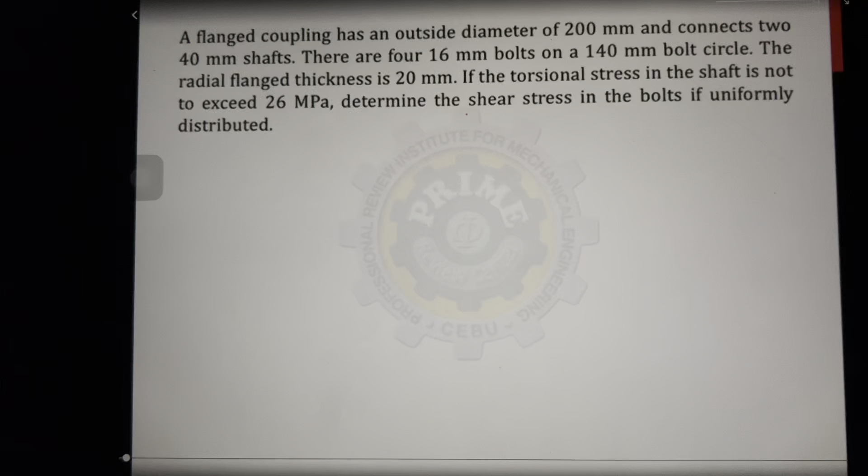Next one, a flange coupling has an outside diameter of 200 millimeters and connects two 40 millimeter shafts. There are four 16 millimeter bolts on a 140 millimeter bolt circle. The radial flange thickness is 20 millimeters. If the torsional stress in the shaft is not to exceed 26 megapascal, determine the shear stress in the bolts

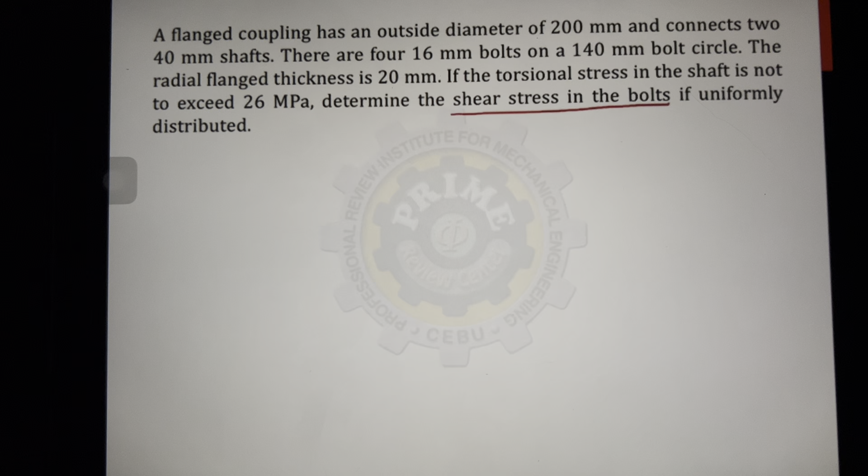if uniformly distributed. So again, yung ulit na nawawala, the bolt shearing stress. Formula still the same, 8T over pi d squared D_B times n. So given, so ito of course ating unknown. The small letter d is our bolt diameter, which is given. Capital letter D sub B is our bolt circle diameter. And n is our number of bolts. Given.

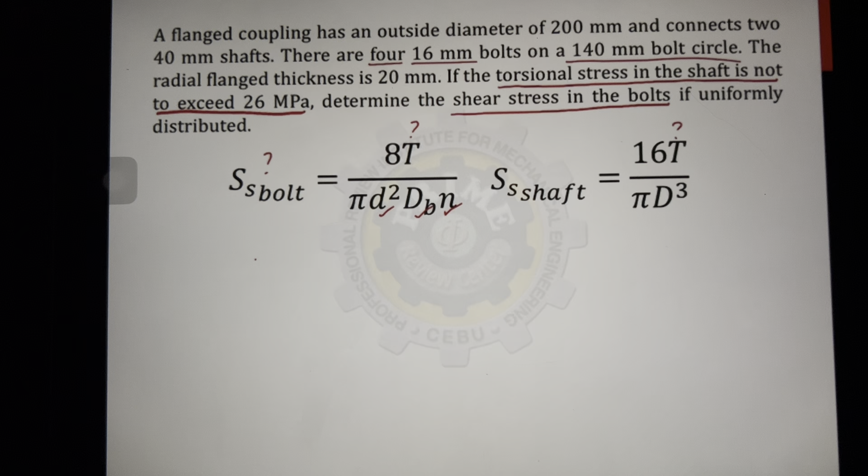Okay, our shear stress of the shaft is 26 megapascal or Newton per millimeter squared. So, equivalent to 16T over pi times ang diameter ng ating shaft. So, we have two 40 millimeter shafts. It would be 40 cubed. So, ito yung naka-millimeter and then raised to 3. So, cancel ang dalawang millimeter. So, our torque will be Newton millimeter.

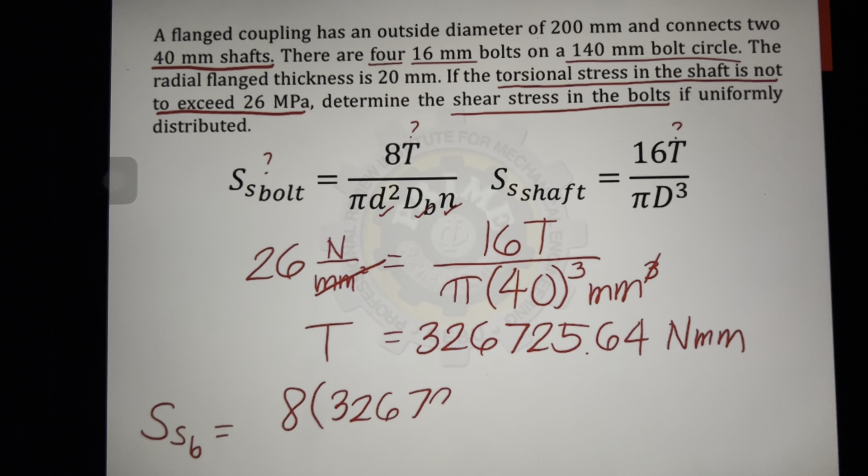What is our torque? It is equivalent to 326,725.64 Newton millimeter. So, ngayon, pwede natin masolve ang shearing stress of bolts. That will be 8 times our torque over pi times d squared, that's bolt circle of 140 millimeter times number of bolts 4. Cancel a millimeter. This will be Newton per millimeter squared or megapascal.

What is our shear stress per bolt? It is equivalent to 5.80 megapascal.

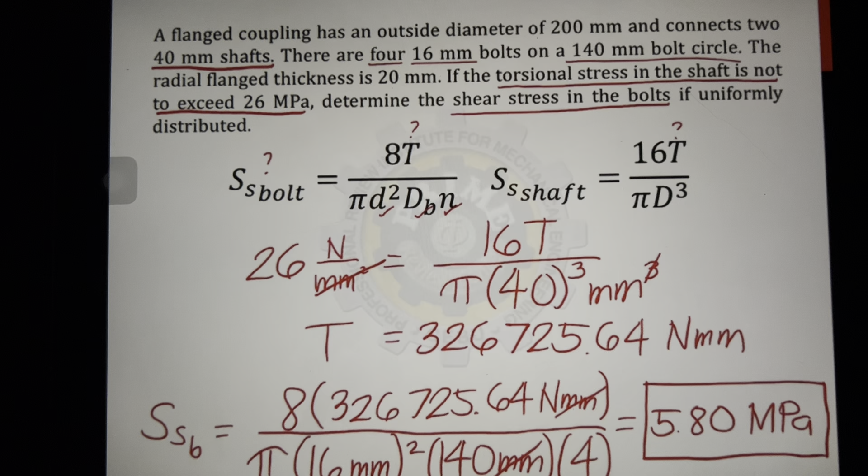Two short shafts having identical diameters of 38.1 millimeter and rotating at 400 RPM are connected by a flange coupling having 4 bolts with a 100 millimeter bolt circle. The design shearing stress of the bolt is 12 megapascal and design compressive stress on the flange is 15 megapascal. How thick should the flange be in millimeters?

So ito yung ano natin. Punta natin yung stress sa ating flange, which is 2T over d times t times bolt circle diameter times n. So itong thickness, ito yung ating small letter t. So identify natin given. So meron tayong compressive stress in the flange which is 15 megapascal. So ano pa given sa atin? The flange coupling has 4 bolts, so meron tayong n, with a 100 mm bolt circle. So meron tayong bolt circle diameter.

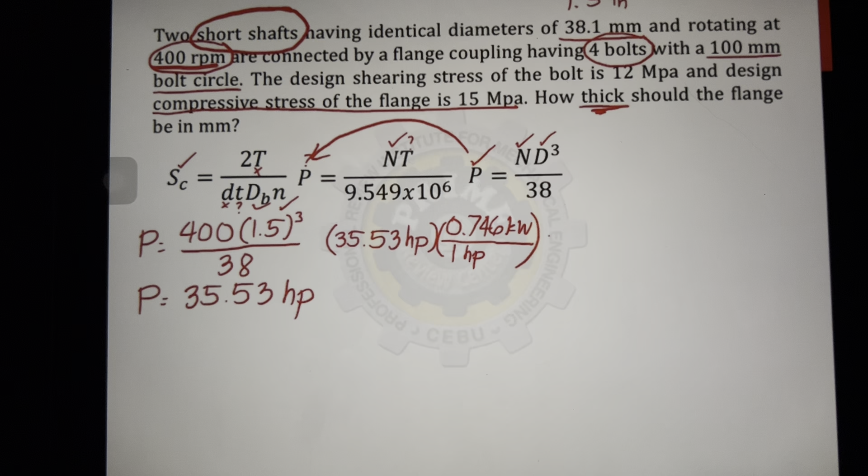So dito, meron tayong power. Gagamitin na natin. So the power, using this formula, dapat naka kilowatts. So 35.53 horsepower, convert natin into kilowatts. So we know, per 1 horsepower, there are 0.746 kilowatts. It's equivalent to N, which is 400 RPM, times the torque, divided by 9.549 times 10 to the 6. So, ang torque natin in Newton millimeters.

So, torque is 632,749.68 Newton millimeter. So, ngayon, meron tayong torque. And sa ating formula nito, kailangan pa natin ng small letter d o yung diameter ng kada bolt. So, paano natin kukunin ang diameter of each bolt? So, balikan natin ito na given.

The design shearing stress of the bolt is 12 megapascal. So, binigyan tayo ng shearing stress of the bolt which has a formula of 8T over pi d squared D_B n. Meron tayong torque, meron tayong diameter, meron tayong number of bolts, at given din ang shearing stress, solve natin ang diameter of each bolt. So, the design shearing stress of the bolt is 12 megapascal.

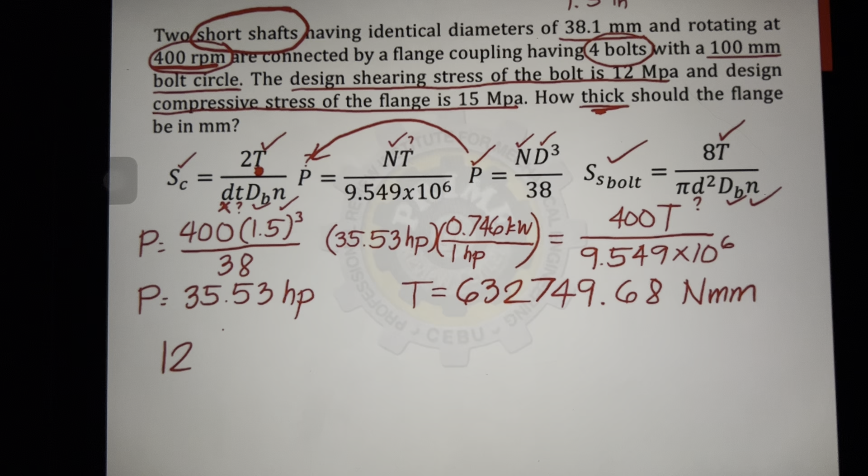Newton per millimeter squared is equivalent to 8 times the torque, which is 632,749.68 Newton millimeter over pi d squared times bolt circle diameter of 100 millimeter times number of bolt, which is 4. Okay, cancel ang Newton. Cancel ang mga millimeters. So, ang diameter natin ay millimeters. What is the diameter of each bolt?

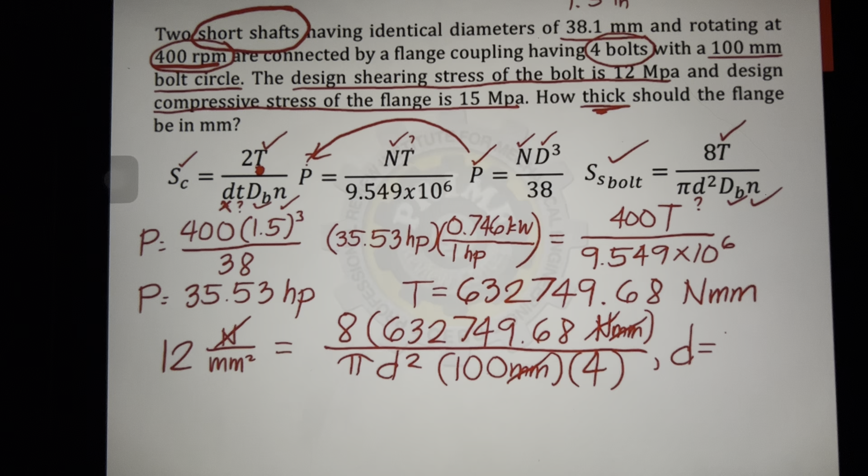It is equivalent to 18.32 millimeter. Ngayon, meron tayong diameter ng bolt. Pwede natin masolve ang thickness of the flange. So, our compressive stress of the flange is 15 megapascal, Newton per millimeter squared, equivalent to 2 times the torque

divided by the diameter of the bolt, which is 18.32 millimeter, times the thickness times the bolt circle diameter, which is 100 millimeters, times the number of bolts, which is 4. Okay, cancel out mm. Cancel out Newton. So, natirang unit ay millimeters. That will be our unit for thickness. What is our answer? It is equivalent to 11.51 millimeters.

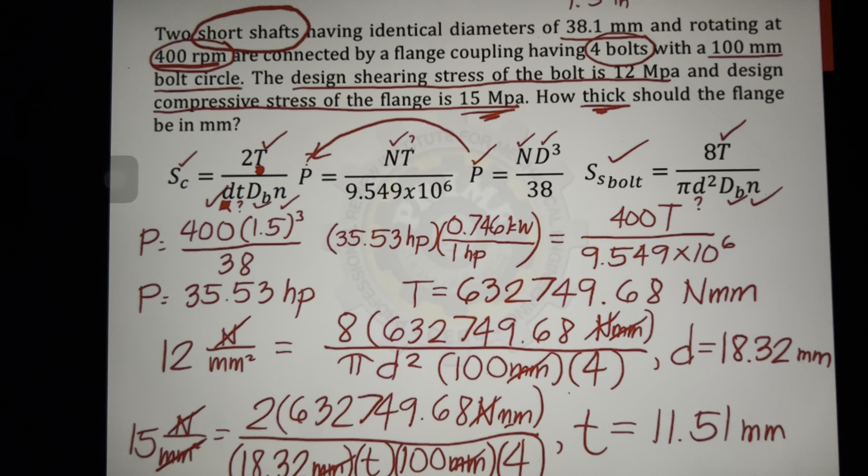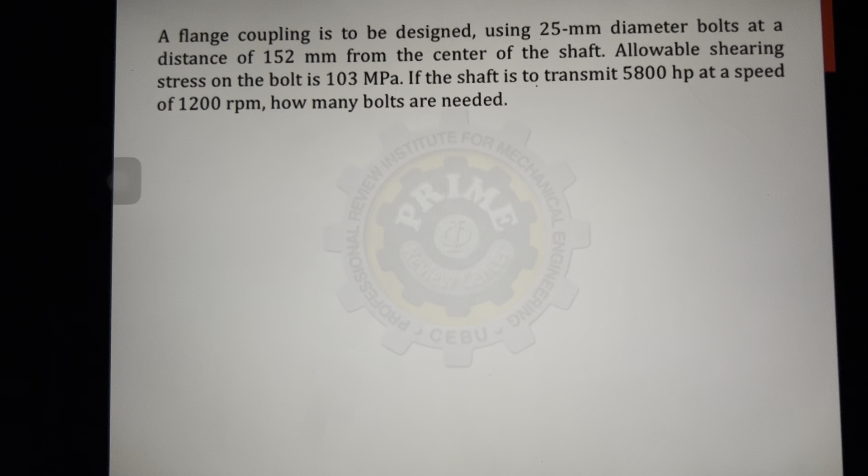Next one. A flange coupling is to be designed using 25 mm diameter bolts at a distance of 152 mm from the center of the shaft. Allowable shearing stress on the bolt is 103 megapascal. If the shaft is to transmit 5,800 horsepower at a speed of 1,200 RPM, how many bolts are needed? So, nawawala ay n. So, binigyan tayo ng allowable shearing stress. So, gamitin natin ang formula niya.

So, given ang shearing stress of the bolt, that's 103 megapascal. Given ang diameter of the bolt, which is 25 millimeters. Nawawala ang number of bolts. So, kulang pa dito ang torque. Let's solve using the power formula. May binigay bang power? Yes, that is 5,800 horsepower. But take note, pag ginagamit ang formula na ito, ito ay dapat kilowatts. So, yung ating 5,800 horsepower, gawin ko muna kilowatts.

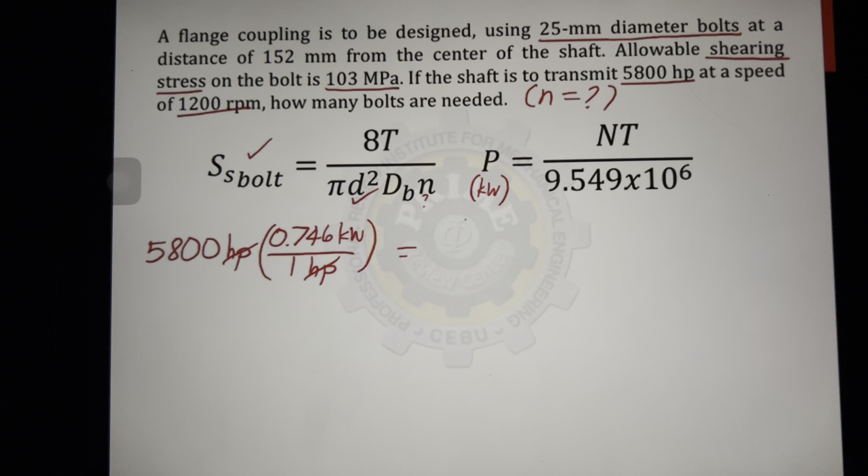So, we know, per 1 horsepower, there are 0.746 kilowatts. So, ano ang ating N? Speed in RPM, which is 1,200, times the torque in Newton millimeter divided by 9.549 times 10 to the 6. Ano ang ating torque in Newton millimeters? This is 34,430,511 Newton millimeter. Meron tayong torque.

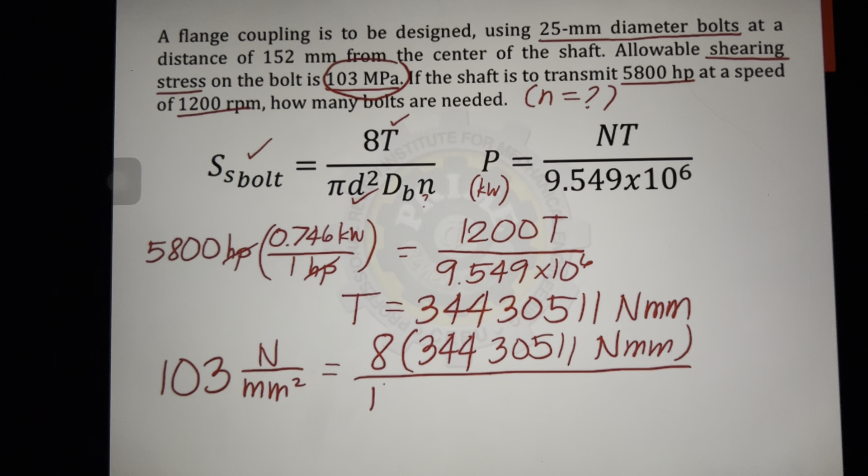So, lagay natin, the shearing stress of the bolt is 103 megapascal, Newton per millimeter squared, is equal to 8 times the torque divided by pi times the square of the diameter of each bolt, which is 25 millimeters, and then the bolt circle diameter. May binigay ba na diameter of the pitch circle or the bolt circle?

Kung mapapansin, may sinabi dito na ang ating mga bolt ay at a distance of 152 millimeter from the center of the shaft. So, ano ang ibig sabihin nun? So, for example, ito yung ating bolt circle. Dito, meron tayong distance na 152 millimeters from the center of the shaft. So, ano ang tawag dyan? Yan ang ating radius, diba? Radius ay distance from the center to any point in our circle. And since ito ay bolt circle, yan ay radius ng bolt circle.

Ang kailangan ko ay diameter ng bolt circle. So, yung 152 millimeters, i-multiply pa ng 2 para maging bolt circle diameter. And then, nawawala yung n. Pwede ko ma-cancel ang millimeters, pati yung square millimeter. So, ano ang ating number of bolts? Ilan ang kailangan na bolt dito sa operation ng ating flange coupling? It is equivalent to 4.48